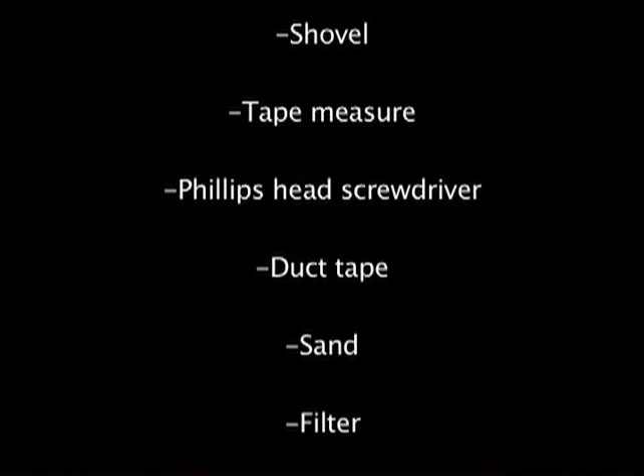Be sure that you have all the necessary tools and materials on hand before beginning the construction of your pool. Not having the appropriate items on hand when they are called for can make the job much more difficult than it needs to be.

If you have not already done so, separate the different kinds of hardware. This will make it easier to find the necessary pieces when they are called for, and help you become familiar with the different types of hardware you will be using during the assembly of your pool.

In choosing the site to assemble your pool, you want to avoid areas with steep slopes or underground obstructions. You also must be sure that the site you choose complies with all state and local codes.

A transit is the easiest and most precise way to tell you how level your site is. Transits are easy to use and can be rented at most local equipment rental outlets. If you do not have access to a transit, a long straight board with a carpenter's level will do the job.

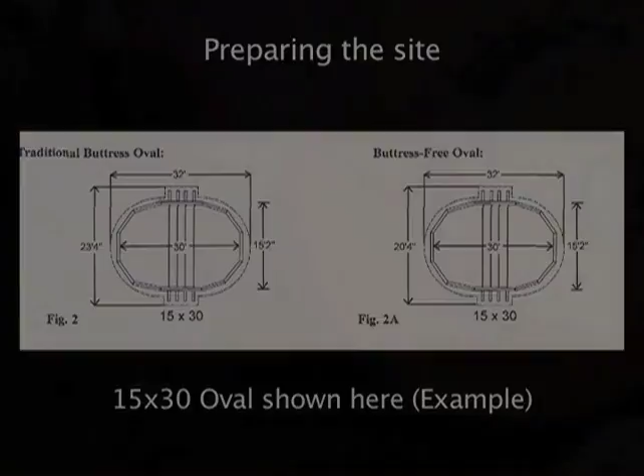Once you have determined exactly where your pool will be going, remove all of the sod from inside that area. The pool cannot be installed on top of any grass.

A great tool for removing sod quickly and neatly is a sod cutter. This is also a tool that can be rented at a local equipment rental center, and you can be taught easily how to use it in a matter of minutes. If you do not have a sod cutter, this can be done manually by using a shovel.

It is important that you dig down the high areas and do not build up the low areas. Building up the low areas will cause the pool to settle and possibly cause major problems down the road. The entire area should be within 1 inch of being perfectly level before proceeding to the next step.

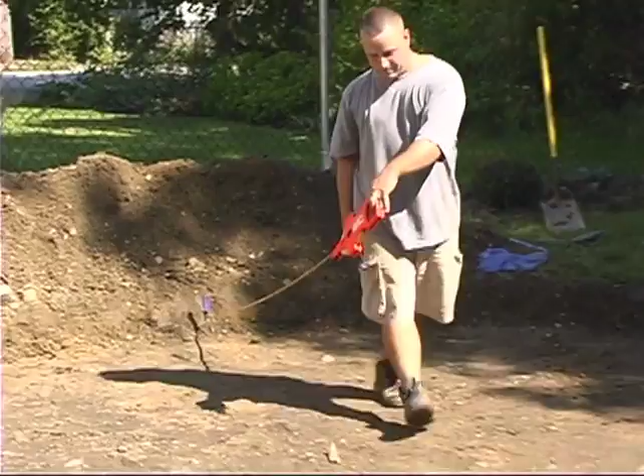Measure off from the ends of your site and stake off the center point for your pool.

Bring your pre-assembled buttress or your buttress-free assemblies onto the site. Using your stake center point as a guide, lay out the assemblies for your size pool as per your installation instruction booklet.

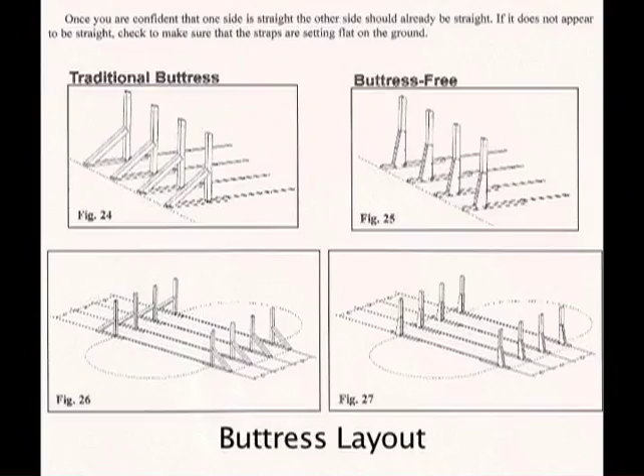Attach the straight side bottom rail connectors to the strap end channels as we show here.

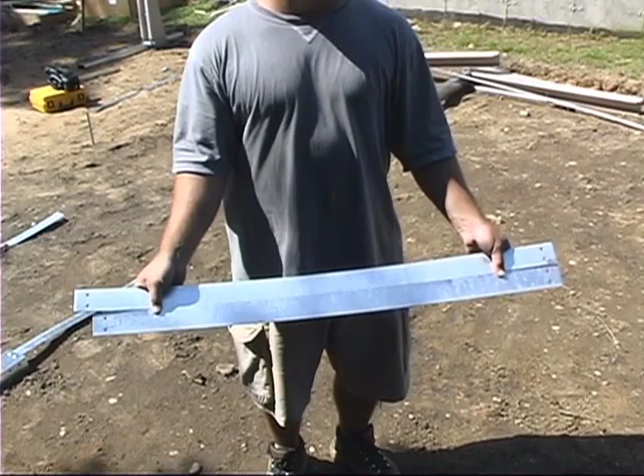There are 2 different size straps packed with each pool. Each strap is marked with a part number and the length. Consult your instruction booklet to make sure you are using the correct size and quantities of strap sections for your pool.

Assemble straps using 1/2 inch long bolts and nuts. Make sure they are as tight as possible using hand tools.

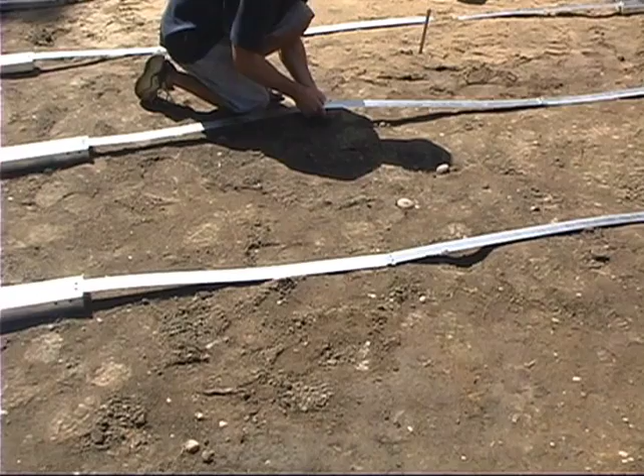Most oval pools have 3 different length bottom rails. They're color-coded by length on one end. The corner bottom rails are used on most size ovals as a transition piece from the straight sides to the curved sides.

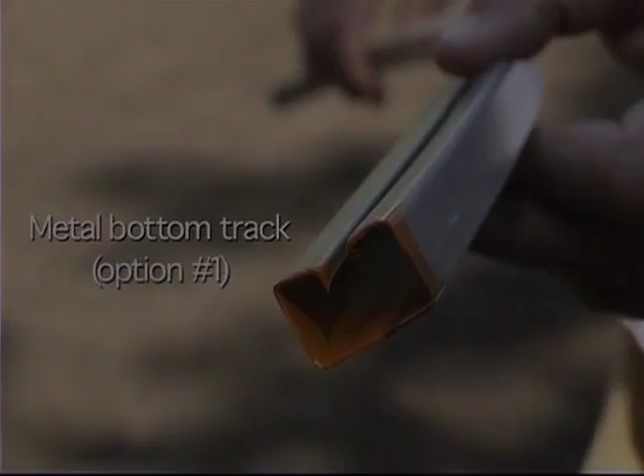The straight side bottom rails are used between each of the straight side upright assemblies. The curved side bottom rails are the longest ones, and they are used to form the curved sides of your pool.

Please be aware that some pools use resin bottom rails instead of the metal rails. Be sure you are using the correct bottom rails and not the stabilizer rails. Most stabilizer rails for the curved sides have a male and female end, so they are crimped on one side. These rails are also smaller in size than the bottom rails are.

There are a few different kinds of bottom plates that we use. The most common is the metal bottom plate. Some pools use a resin bottom plate. Here is an example. Others will use a resin bottom cuff. Here is an example.

Assemble your bottom track by sliding the bottom rail into the bottom plate up to the dimple on the plate. This is done exactly the same way for pools with resin bottom plates and rails. Resin bottom cuff pools are also done in the same fashion.

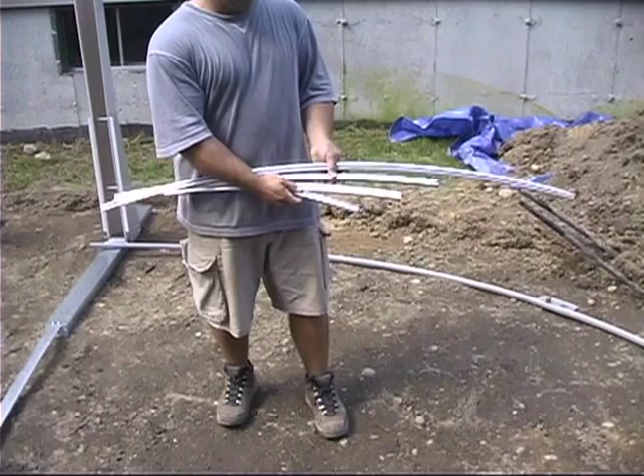Most oval pools have 4 different length stabilizer rails. The stabilizers are the rails with the smaller profile, and they are usually unpainted. These rails will also be color-coded by size. Do not use these rails on the bottom of the pool.

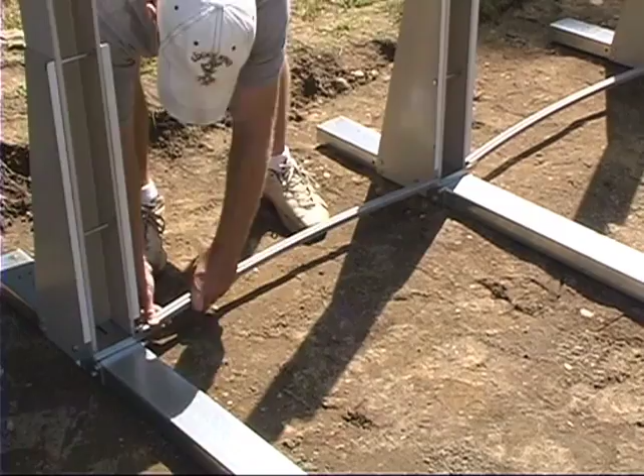Install the straight side bottom rails by inserting them into the straight side bottom rail connectors and pushing them down. This will help you establish the correct spacing between the straight side assemblies.

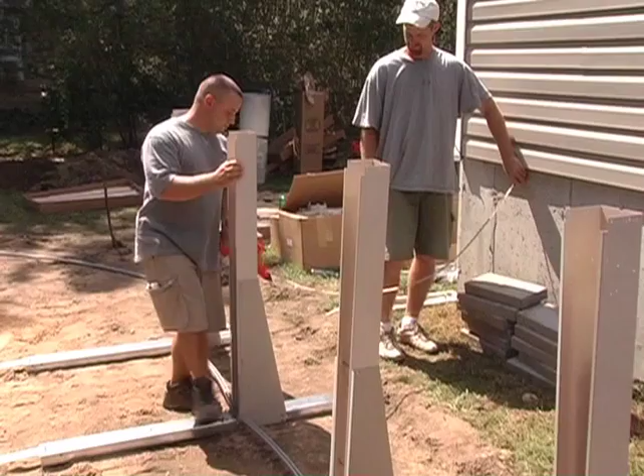In order to make sure the straight side uprights are parallel with each other, we measure the distance from the house to each upright, making sure each measurement is the same. If you are not close enough to an existing structure, such as a house or fence, to do this, you can draw a string along the straight sides to get the same effect.

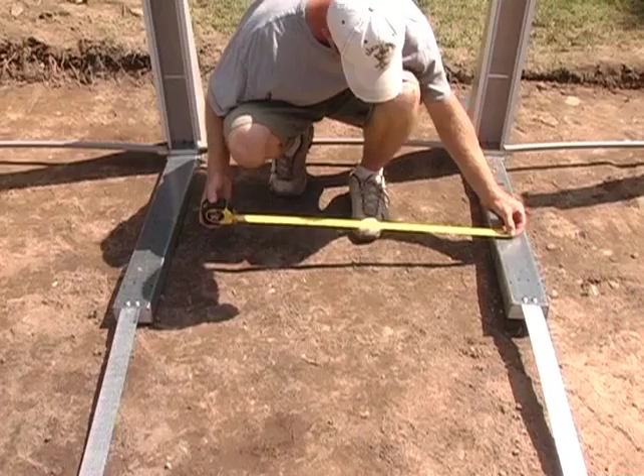Each of the strap end channels should be sitting 42 inches on center from the channel or channels next to it.

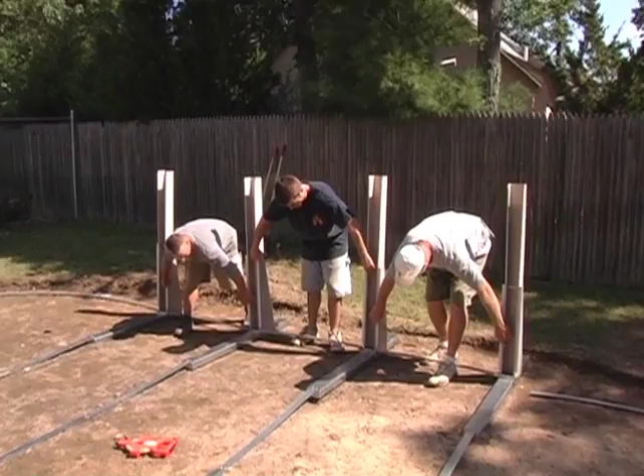Measure from the first straight side upright on one side to the last straight side upright on the opposite side. Then measure the 2 opposite uprights. The measurements should be identical. If they are not, you should move the uprights until those measurements are the same.

Once you are confident that everything is laid out properly, check the site again to see how level it is.

You should now temporarily remove the straight side bottom rails so that you can level the strap end channels. Mark the area around the strap end channel so that you know where to dig.

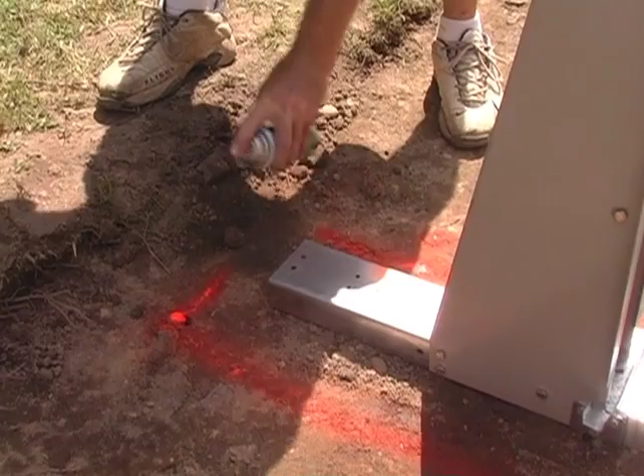The strap end channel is 2 inches tall, so you will need to trench out a 2-inch deep area where the strap end channel sits, so that the top of the strap end channel is flush with the top of the ground.

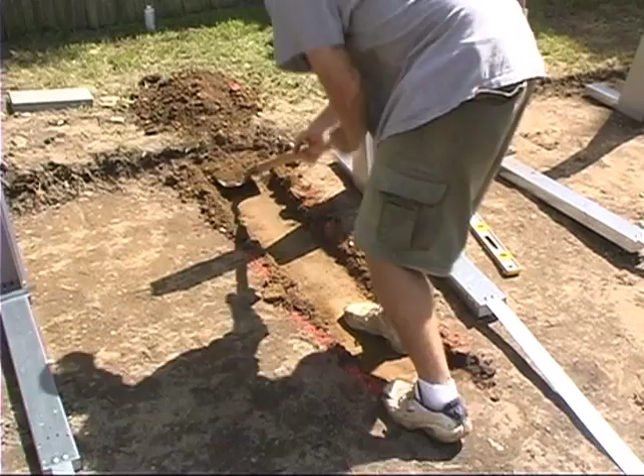Place the oval upright assembly into the trench.

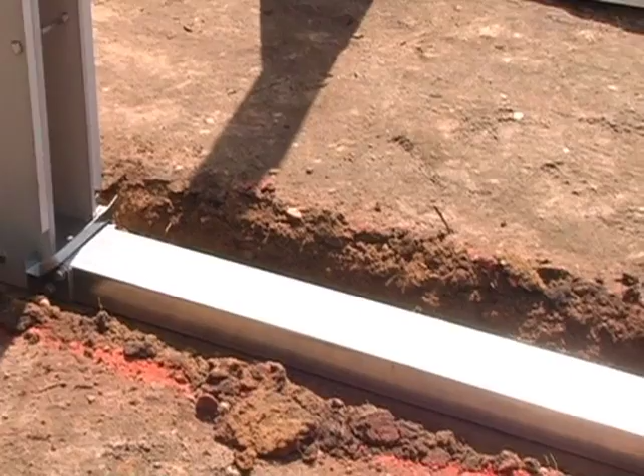Make sure the upright is level using a carpenter's level.

Repeat this process for all assemblies.

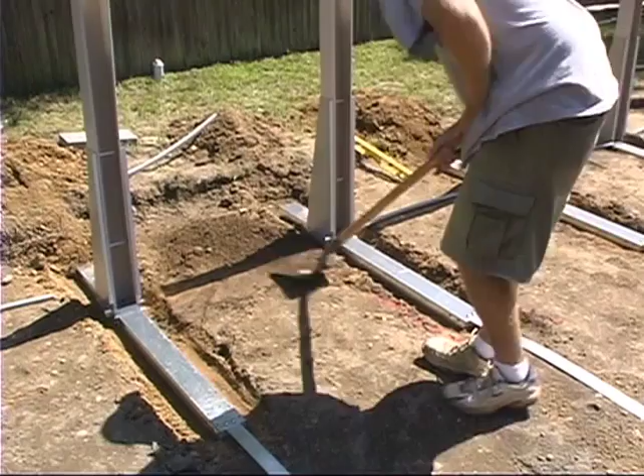Clean up and level the area between the oval upright assemblies and replace the straight side bottom rails so that they are sitting flat on the ground.

Clean up the areas between the strap end channels inside the pool so the pressure plates will also sit flat on the ground.

Lay out the pressure plates so that the holes in the center of each plate line up with the holes in the center of each strap end channel.

Secure pressure plates to the strap end channels using 2 number 12 screws in each.

Connect the pressure plates to each other using 3 number 12 screws at each point that the plates overlap each other.

Again, measure the diagonals of your pool to make sure that the straight sides are still square, as demonstrated earlier. Make any necessary adjustments at this point if they are not.

Place a patio block under the outside end of the strap end channel. Make sure that the block is level in all directions so that the channel sits flat on the block.

Recheck that the oval upright is still level.

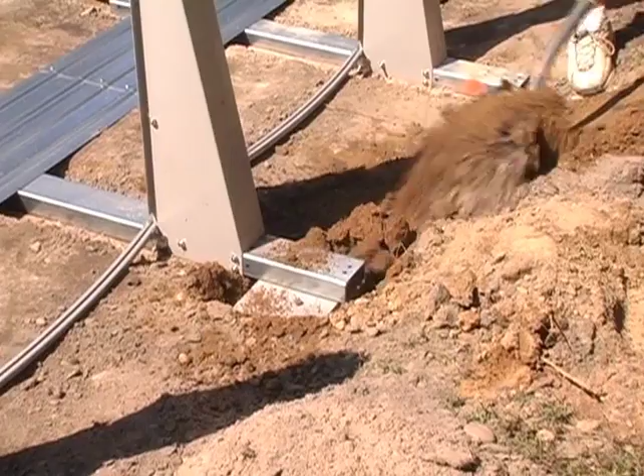Backfill the area where the block has been placed. You should completely cover the strap end channel outside of the pool.

Cart the sand or pool base into the pool area.

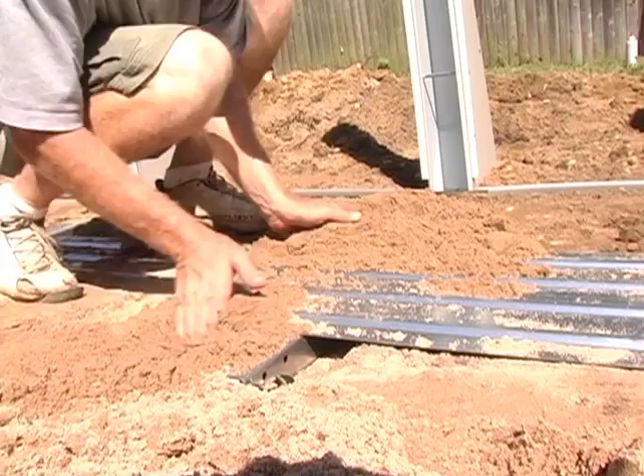Thoroughly pack the sand or base into the trenches. Be sure to completely fill in the areas under the pressure plates to avoid getting sinkholes after the pool is filled with water.

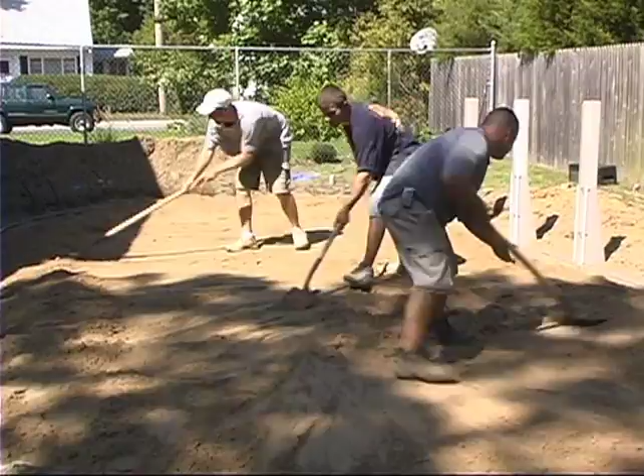Spread the sand or pool base equally throughout the pool area.

Check the measurement from the first straight side upright to one of the curved side bottom plates or cuffs. Then, check the same measurement from the opposite straight side upright and curved bottom plate.

If these measurements are equal, you can secure your corner bottom rails to the straight side bottom rail connectors and stake the curved side bottom track into place.

Level each of the bottom plates or bottom cuffs. All of these parts should be within a half inch of each other and the tops of the strap end channels.

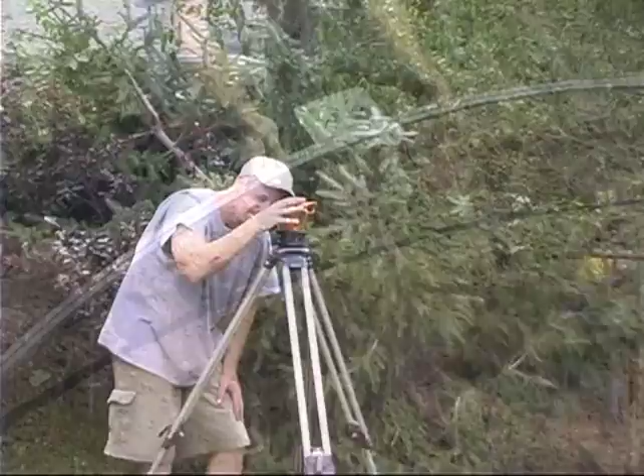Place a patio block under each of the bottom plates or cuffs. The block should be recessed into the ground so the track is still sitting on solid ground. Make sure the block is level in all directions.

Once the block is in, recheck the level of the plate or cuff to make sure it's at the same height as it was before you put the block down.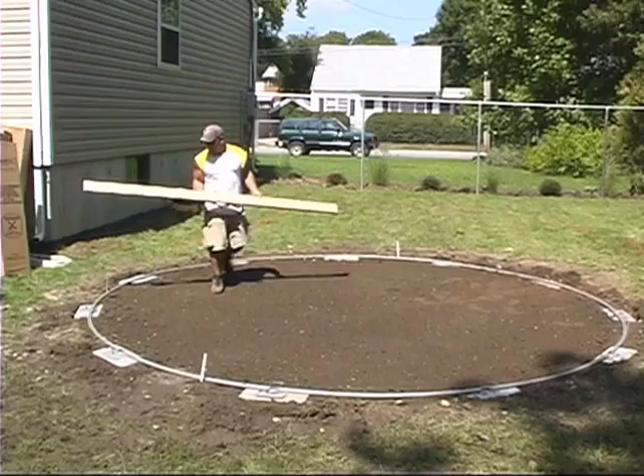Again, this can be done without a transit. You can use a long straight board and a carpenter's level to do this job.

We recommend using landscaping stakes with C-clamps around the pool area to help hold the wall during the installation.

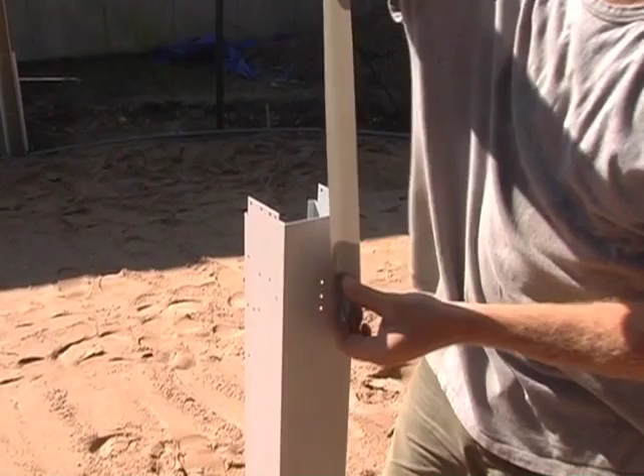Bring the pool wall into the pool area using a flattened carton to rest it on. Make sure the skimmer cutout is on the top portion of the wall.

Begin by placing the wall into the track at the center of a bottom plate or cuff. Continue inserting the wall into the track around the pool, clamping it as you go.

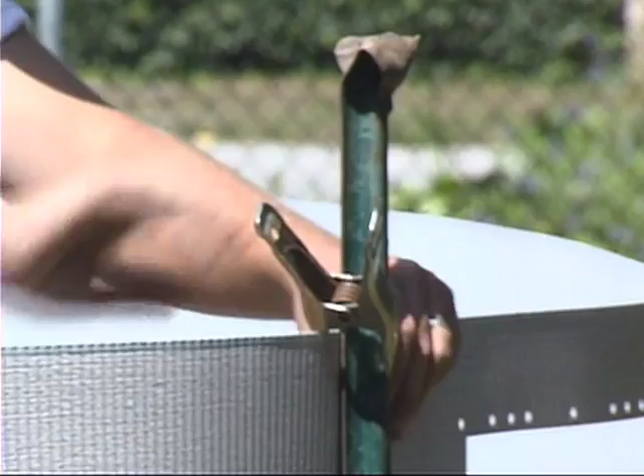If the skimmer or return cutout fall over a bottom plate, you will need to move the wall and expose the wall joint to clear them.

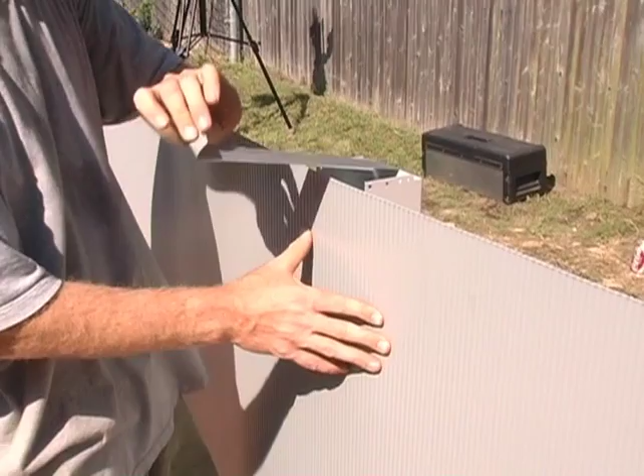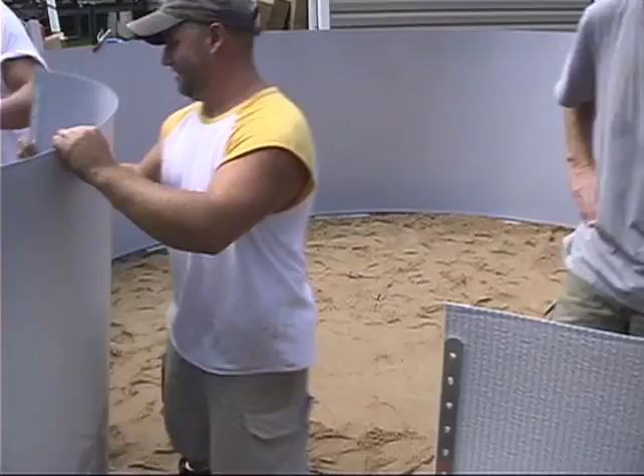If you get to the end and the wall does not properly line up, you can pull the wall back and move the curved bottom rails in or out of the bottom plates or cuffs to get the necessary adjustment. This should be done evenly around the pool and not just where the wall joint lies.

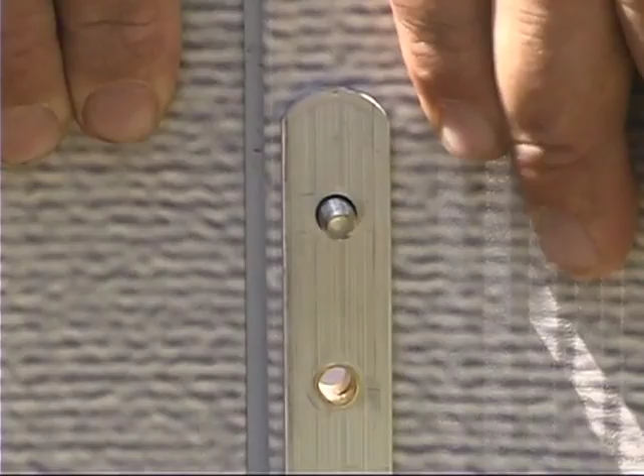If your pool has a single row of wall bars, they will be pre-attached with rivets. Simply line up the two sections so that the aluminum wall bars do not touch each other. Secure using the wall bolts and nuts. You must have a bolt in every hole or your pool will break. All nuts should be as tight as possible using hand tools.

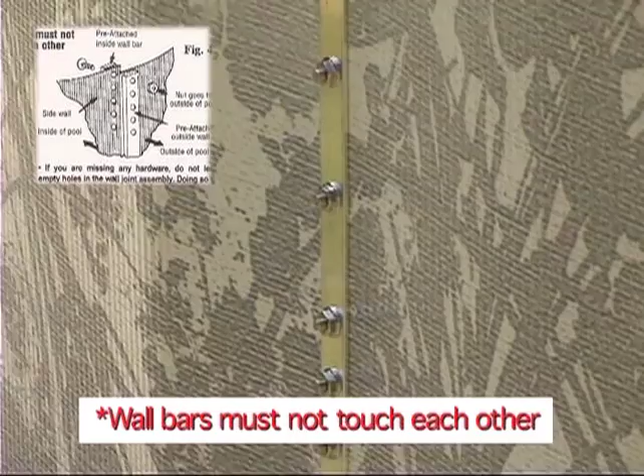Cover all of the bolt heads inside of your pool using 3 layers of duct tape to protect the liner from edges of the hardware or any burrs created by the screwdriver.

With a staggered wall bar system, the wall bars are not pre-attached. Line up the two sections of the wall so they are touching each other. Place one wall bar on the inside of the pool and one on the outside of the pool wall. Connect them using the wall bolts and nuts.

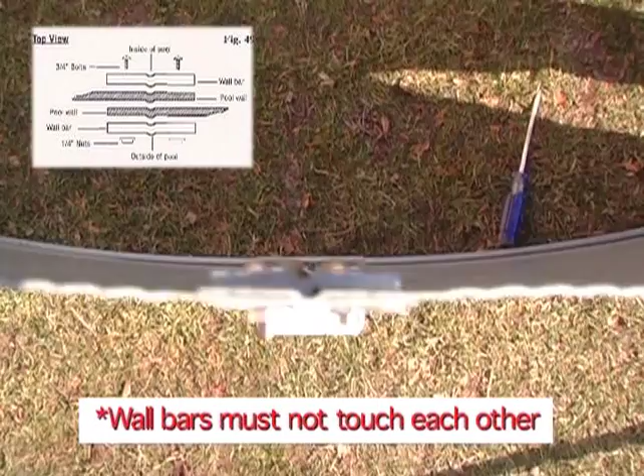The wall bars must not touch each other or your pool will break. All holes must have securely tightened nuts and bolts, and all hardware should be as tight as possible using hand tools.

Cover all of the bolt heads inside of your pool using 3 layers of duct tape to protect the liner from edges of the hardware or any burrs created by the screwdriver.

Install the curved side uprights onto the bottom plates. The top of the upright usually can be determined by an extra hole in the center or on each side for the top covers. The uprights are secured to the bottom plate using number 10 screws.

If your pool has bottom cuffs, there is no hardware necessary to secure the uprights. Simply line the upright into the bottom cuff and snap it down into place. When done properly, you should see all of the tabs going through the holes in the upright.

Build a 6 to 8 inch high cove along the inside of the pool wall.

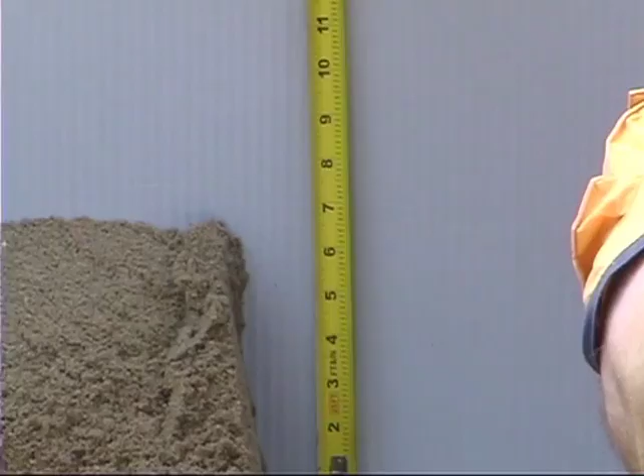Pack down the cove you have built using a tamp or trowel. Be careful not to scratch the pool wall.

Smooth out the sand or pool base using a rake.

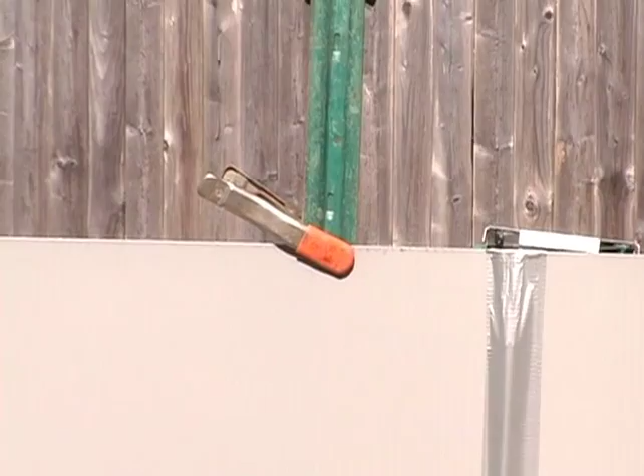If you are using a snap bead liner, place the beaded liner track over the top of the pool wall as we demonstrate here.

Place the 8-inch long stabilizer rails over the top of the beaded liner track at each straight side upright.

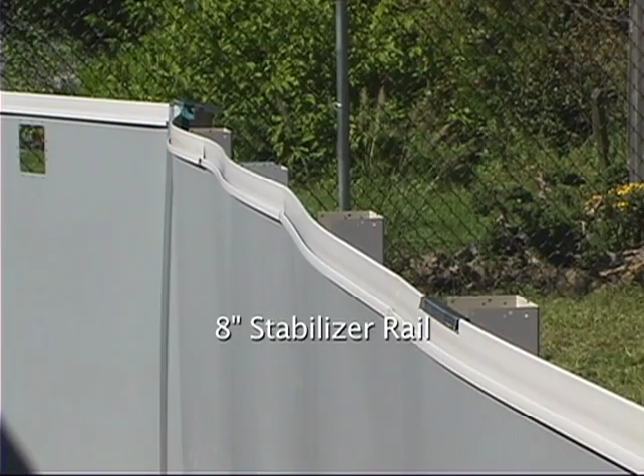Clip the straight side top plate over the 8-inch stabilizer rail and secure it to the straight side upright using number 10 screws.

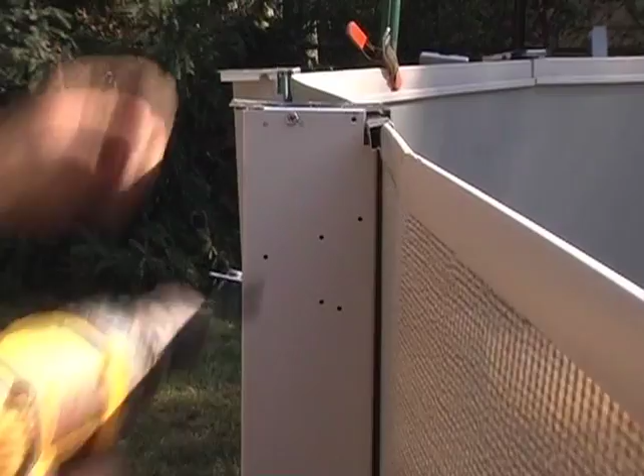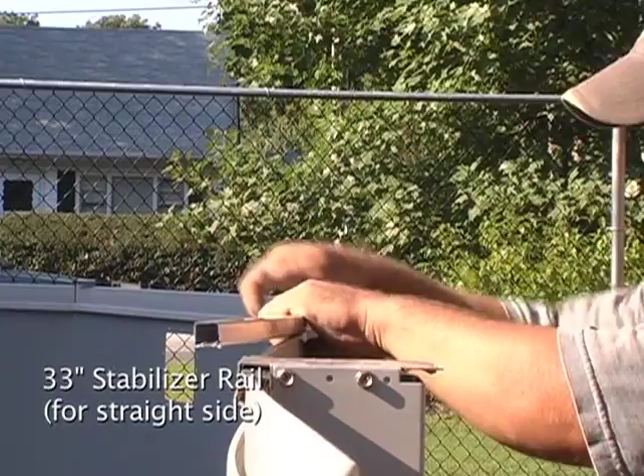Slide the 33-inch long stabilizer rails between each of the 8-inch long stabilizer rails.

Install the curved side stabilizer rails. These rails will telescope into each other approximately 1 inch, forming continuous arcs around the curved sides of the pool. Once all the stabilizer rails are on, you will no longer need the landscaping stakes and C-clamps.

Install the curved top plate by snapping it over the stabilizer rail and securing it to the upright using number 10 screws.

Make sure the uprights are perfectly straight up and down using a carpenter's level.

Be sure to wet the sand prior to tamping it. This will help the sand pack better.

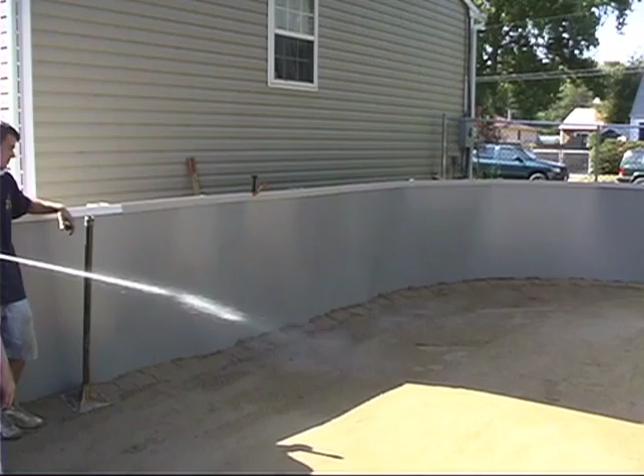Tamp the entire bottom of your pool. Doing this will help reduce footprints in the sand and provide a firm and even bottom for your pool.

Once the tamping is complete, you should lightly sweep the sand base so that you brush away any uneven lines caused during tamping.

Unpack the liner from its box. Laying it out in the sun for a few minutes will make it easier to work with.

If you have a Unibead liner and want to use it with a beaded liner track, you need to cut off the top portion of the bead at the line on the bead. Once you start taking it off with a razor for a couple of inches, you will be able to peel the remainder of the bead off.

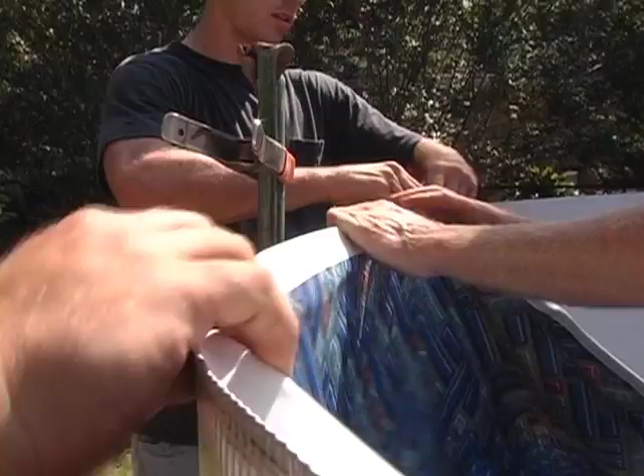The snap bead liner requires a separate bead track. The track is installed on top of the pool wall, and the snap bead liner is snapped into this track.

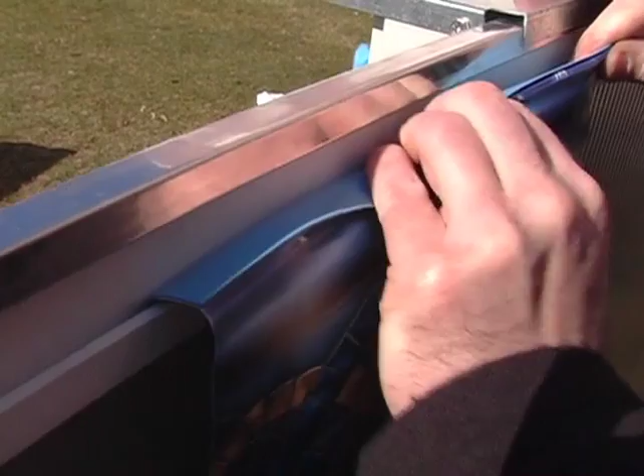Overlap liners are hung over the pool wall and secured in place using plastic coping strips.

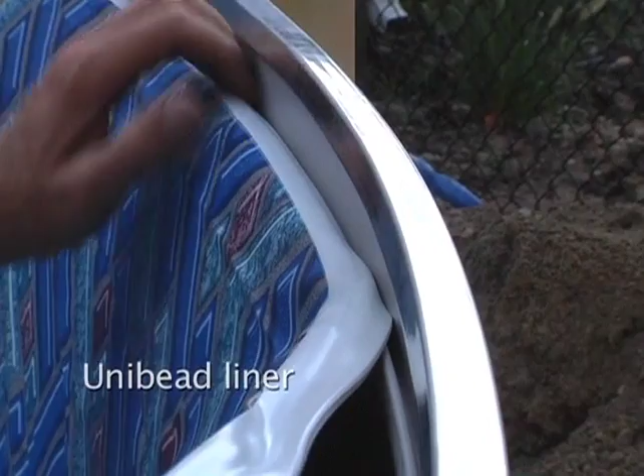Unibead liners can be used as either V-bead or snap bead liners. They come out of the box as a V-bead liner. You can also cut and peel away the V-bead portion, leaving you with a snap bead liner, as we have done here.

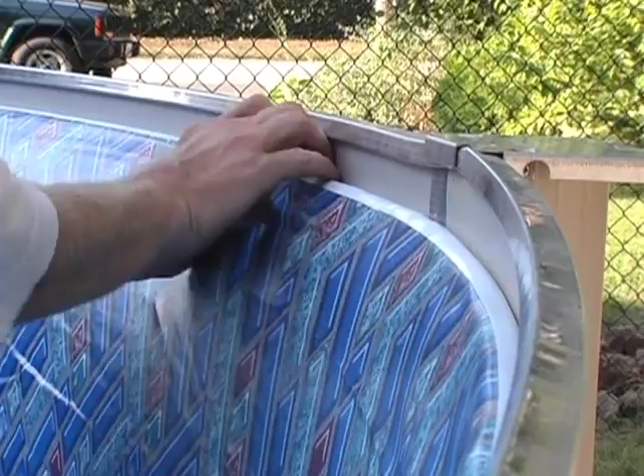Install the top rails loosely using number 10 screws.

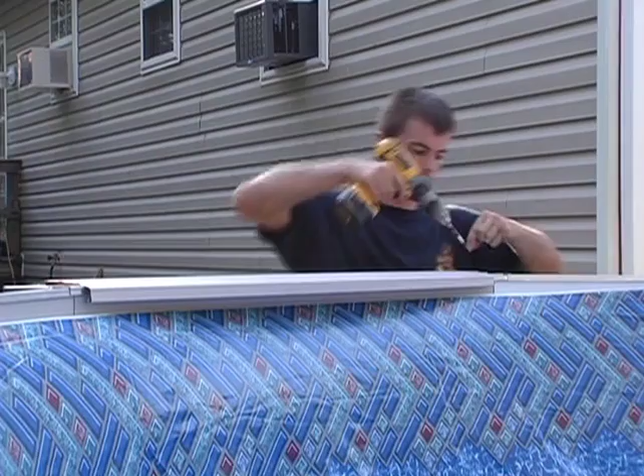Once you have all of the rails in place, you can tighten down all of the screws.

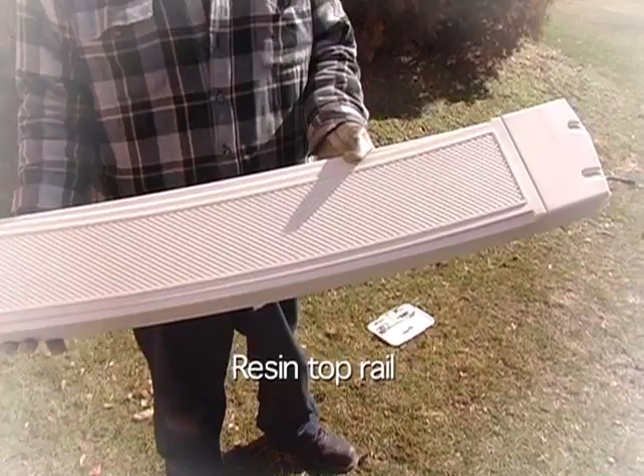If your pool has a resin top rail, this step will be done the same way. But you will use a number 10 screw that is 1 inch long and has a washer attached to it.

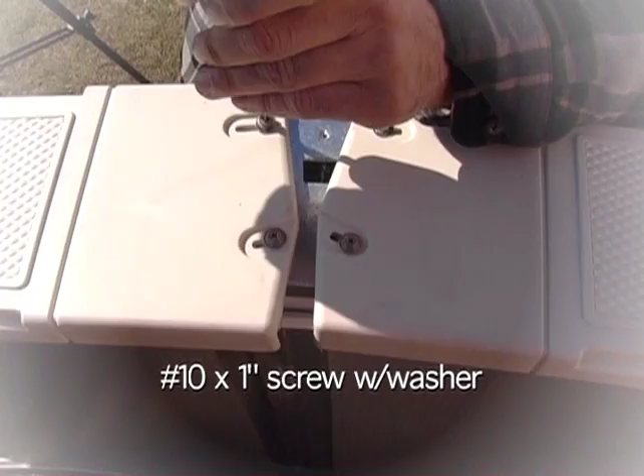Please notice that there are different top covers for the straight side and curved side, as we show here. There are many versions of top covers. Refer to the final step in your instruction booklet to ensure you do yours correctly. Most have 2 halves, like this one. The top covers usually call for number 10 screws, but this is not always the case.

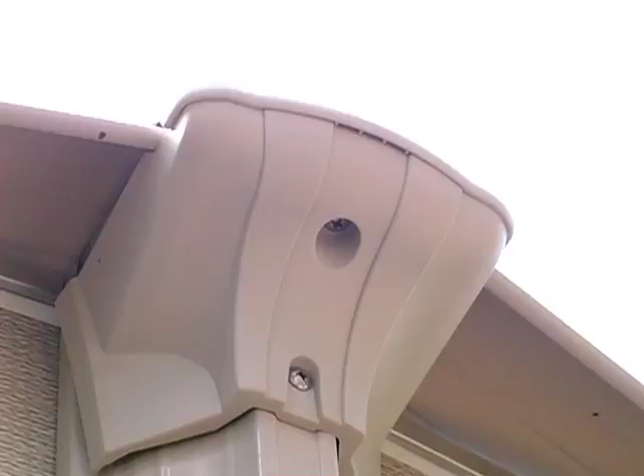Begin filling the pool slowly. It is during this first inch of filling that you will still be able to work out the wrinkles by kicking them to the outside of the pool.

After you are satisfied with the bottom of the liner, you can fill the pool halfway. At that point, consult the separate skimmer instructions on how to install your skimmer and return fittings. Once they are on, you can attach your filter system and fill the pool the remainder of the way.

Before anyone uses the pool, you need to install the safety labels packed in the yellow envelope that came with your pool. If you do not have these labels, please contact your dealer or the manufacturer and you will be given another set at no charge. Your warranty will be voided if these labels are not installed.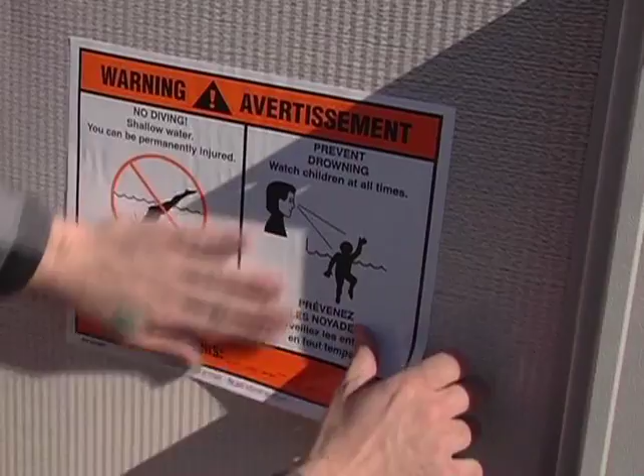The large sticker goes on the outside wall of the pool directly next to the entry system. This should be visible to anyone about to enter the pool. The smaller label is attached on the liner, above the waterline, directly opposite the pool's entry point, again being visible to anyone entering the pool.

See the installation instruction booklet for any additional safety precautions. Never leave children unattended in the pool area. Never leave open access to the pool when there is no supervision present. Follow all local laws and regulations. Obtain all required permits before building your swimming pool. Always use common sense while in or around a swimming pool. Never jump or dive into an above-ground swimming pool. Never sit, stand, or walk on the top rails of an above-ground swimming pool.